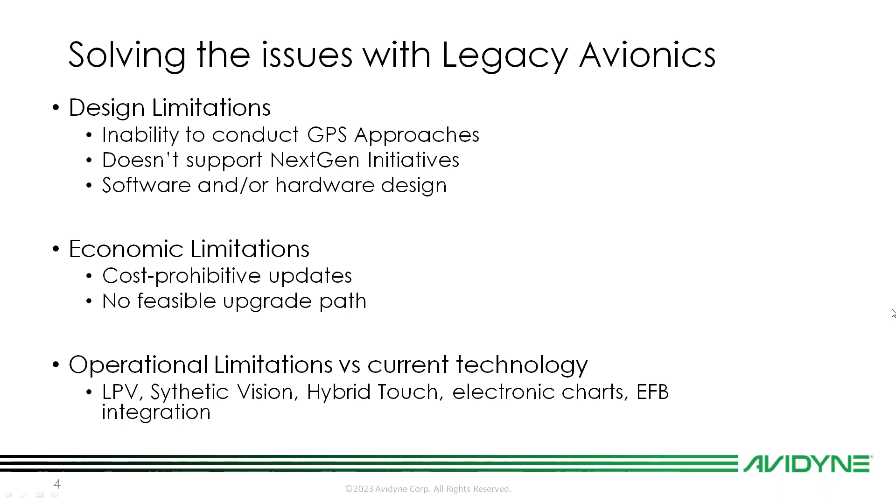Awesome, Bill. Appreciate it. Thank you very much. So what are we talking about here?

Legacy aircraft and orphaned fleets have intrinsic value that can make them viable platforms in today's business class and cargo markets. The intrinsic values include long service lives, lower operating costs, hull values that make economic sense, but they all have the same Achilles heel: your avionics. So for this discussion, legacy aircraft are going to be aircraft that are still providing a very active role in accomplishing today's business, passenger travel, cargo transportation, but they're not a singular integrated avionics suite.

This term legacy aircraft can also be applied to aircraft considered orphan fleets, or aircraft that don't have a direct channel or support arm for upgrades, making them relevant today.

Just an idea of a couple of the aircraft that can benefit directly from Atlas include everything that you see here. Along with a number of other aircraft models not listed, these aircraft make up a really large portion of the operating fleets today, and every one of these can directly benefit from the cost-effective solutions offered by Avidyne. Bill, I'm going to hand this over to you.

Yeah, sure. One of the biggest points of contention here, to dovetail back from the last slide, has to do with cost prohibitive updates. All of these aircraft are influenced by that same issue, which is how do I get my avionics suite upgraded and not break the bank? That's important because there's a typical threshold somewhere around 20% of the hull value of an aircraft.

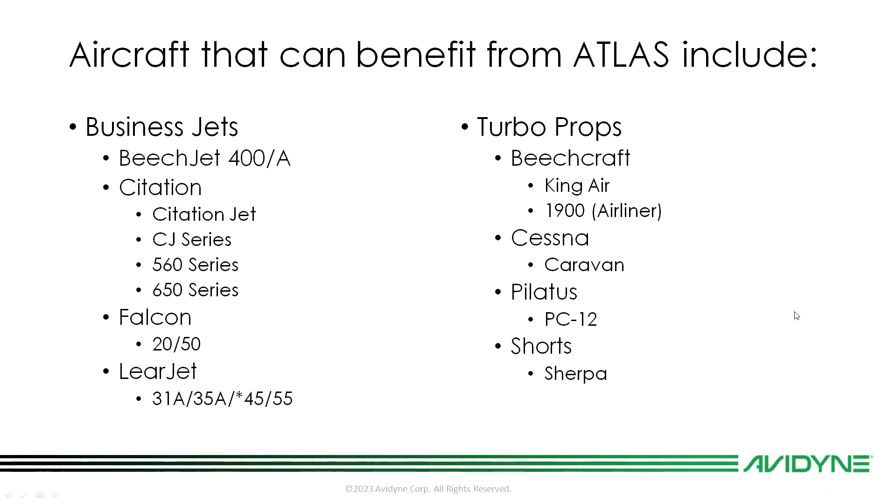I think the key point behind this is the 2 main bullet points: agnostic integration and cost-effective solutions. I think they kind of go hand in hand. Over the years, other OEMs have gone from 'we'll work in any flight deck and we are here for you' to, as popularity grew, 'we're now going to make this a more integral flight deck where you have to have our equipment only.' All the OEMs have kind of done it that way, through the progression of EFIS systems, whether it's Honeywell, Rockwell, even Garmin to a large extent.

But the issue ends up being what happens when you're X amount of years down the road and support on that equipment has dried up, and it's not only integral but has proprietary software in it. That means I don't have a path for doing an agnostic system upgrade - I can't just grab something off the shelf from the past several years and plug it into my deck, because I don't have the software to make those communicate. That's why these legacy flight decks are such a good value point for the Atlas systems - they're opened up to talk 429, some 232, some older legacy ARINC protocols, and we're able to really address those markets in a very concise way.

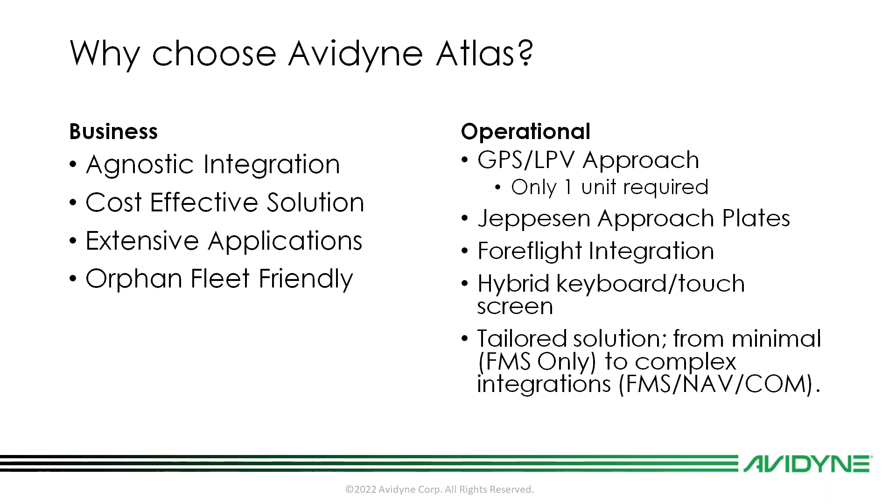Moving right along, we'll get into a little bit of an overview of what Atlas is, what it can do for you, and the technology that we bring in, and what we can provide these aircraft. So, what is Atlas?

It's a new multifunction SBAS FMS that sets a new standard for integration in turbine class navigation systems. Atlas provides full RNP and RNAV capability, including localizer performance with vertical LPV, lateral LNAV, VNAV, LNAV only, and approach procedures with vertical approach modes. We do that through our GLAS technology, our GPS legacy avionics support technology. We'll go into that in some future slides. What it can provide for you right now is full RNP, RNAV capability, LPV, LNAV, VNAV, LNAV only, APV modes.

We've got hybrid touch, which we come to find out the operators that need this solution absolutely love, the combination of touchscreen and knobs and buttons. It's really taken off in the Part 25 world, they're absolutely loving this. Moving maps with airspace, terrain, nav aids, airports overlay on your FMS.

Options for radar, video, TAWS-B. The option for an integrated VHF comm or VOR localizer glide slope radio if we want an integrated solution. Traffic display from TCAS, ADS-B. FOQA support is a major part of this too, we've got some great FOQA integrations that we can do with the Atlas. Jeppesen georeference approach plates and airport diagrams, and of course ForeFlight and other EFB integrations.

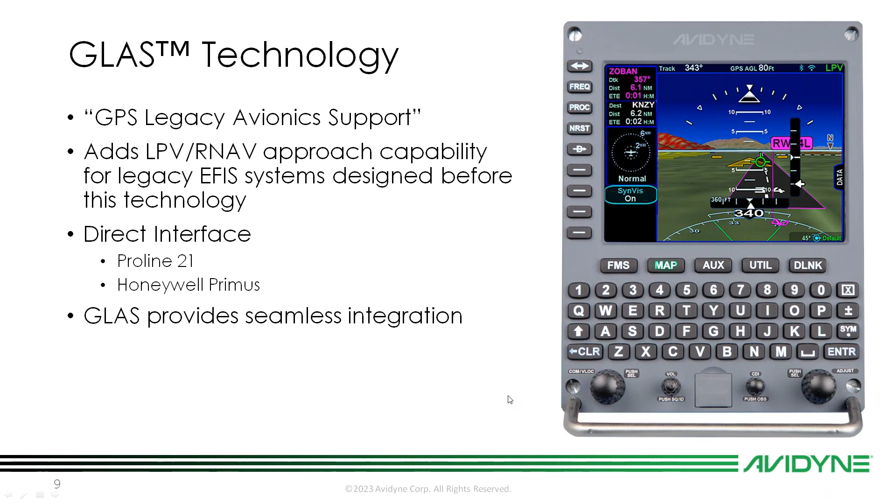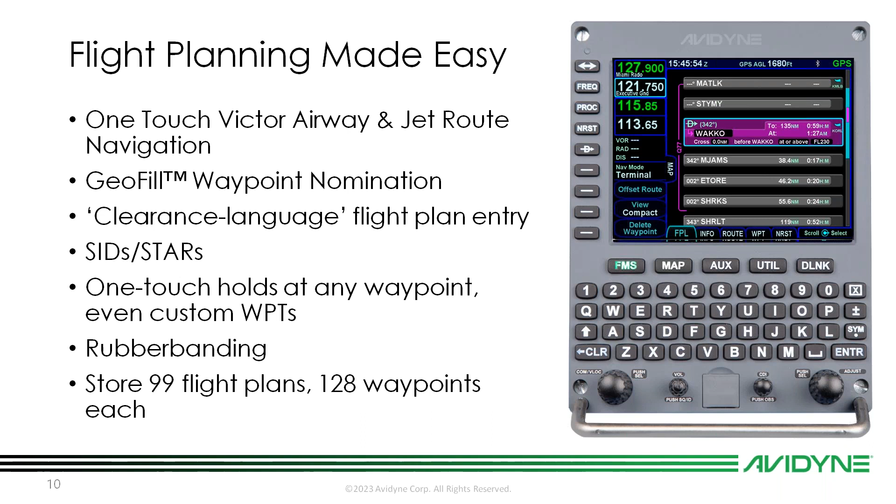Rubber band flight plan editing right here on the Atlas. We've got the ability in each Atlas FMS to store 99 flight plans with 128 different waypoints for each flight plan, and we can store those all in each Atlas. So with two Atlases, you've got double the amount of flight plans you can edit, in case you wanted to.

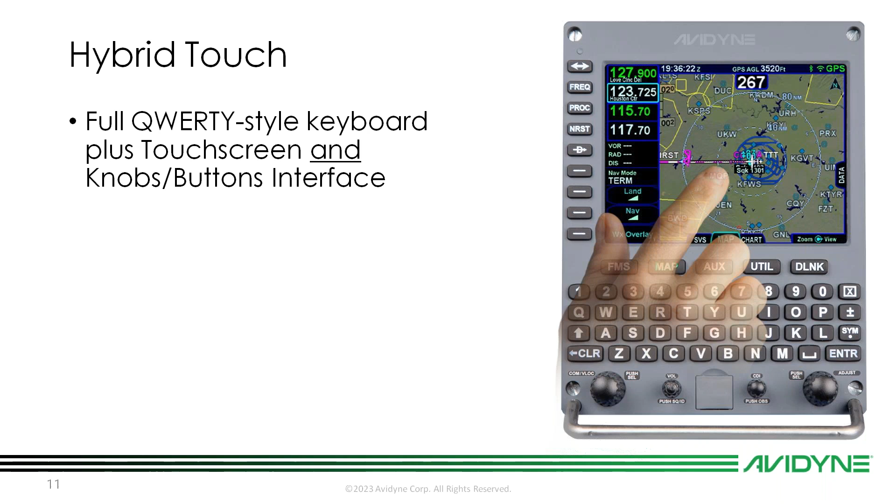So we talked about hybrid touch, right. With hybrid touch we have the ability for touch screen and knobs and buttons on the IFDs, very similar, just about anything you do on the touch screen you can do with knobs and buttons. With Atlas, we've taken that on-screen keyboard on the IFDs and brought that into a full QWERTY physical keyboard, plus the ability for touch screen and knobs and buttons, all on the Atlas units themselves.

We've got the moving map here, so the flight plan is displayed over that map. We can display that map in north up, heading up, track up, with simple one-touch orientation, we do that with the bottom right knob there. The terrain-based map, we have that ability to overlay that on the map too.

Customizable map overlays of off-route waypoints, nav aids, and special use airspaces, plus our customizable data blocks. Now we can see we've got the airspace on our map, terrain that we'll be able to show, airports and airport information right there on the map, and of course all of our nav aids. All of these are completely customizable. I can filter these out if I want to.

I can completely change how these show up with my map zoom, whether that be pinch zoom or turning zoom in and out with my knob. I can show all of these different things and filter them out in certain layers, so it's completely customizable there.

We've got the ability for optional radar and video inputs. This is one of the two different options. If you look on the left side, you'll see our radar overlay here. This is a dedicated radar page, but I can also show this on the map, so I can have a radar overlay on my map.

That supports the RDR 2000 series digital radar. It does have vertical profile support, and it can replace legacy indicators or act as a repeater display for existing radars. Another thing here is the video.

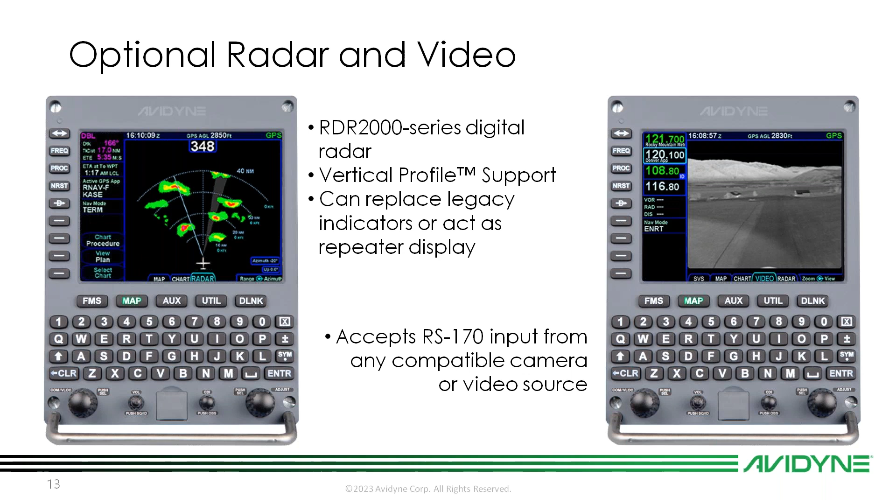So I can accept any RS-170 input from any compatible camera or video source. That is a hardware modification. We'll be able to display that on a dedicated video page on the Atlas. So if I have a camera in the front, the back, infrared, or thermal cameras, as long as I'm getting an RS-170 feed into the Atlas, I can show it on the video tab on my Atlas displays.

And of course, optional TAWS-B, we do have that as an option as well, in case we want integrated TAWS inside the boxes. I know a lot of you guys, and Bill, maybe you want to chime in on this, but most of these installations already have an external TAWS. We do want to let you know that we do have the ability to provide a TAWS unlock in the Atlas boxes themselves.

Bill: A lot of these aircraft are already incorporated with either a TAWS-B or even a TAWS-A solution. So I kind of see this as more for the older fleets, the ones who have been using a very minimal TAWS, maybe a 560 or KGP 560, something like that. But if you're looking at the Mark 5, Mark 7, Mark 22, depending on your platform, this would not be a replacement for that, but it's a very good option for if you're looking for TAWS-B. If you're not interested in the TAWS-B option, you can disable the alert systems and just use the map scenes, the synthetic vision screens for situational awareness.

Yeah, so it's really good for people to know that if you don't have that solution, we can provide it.

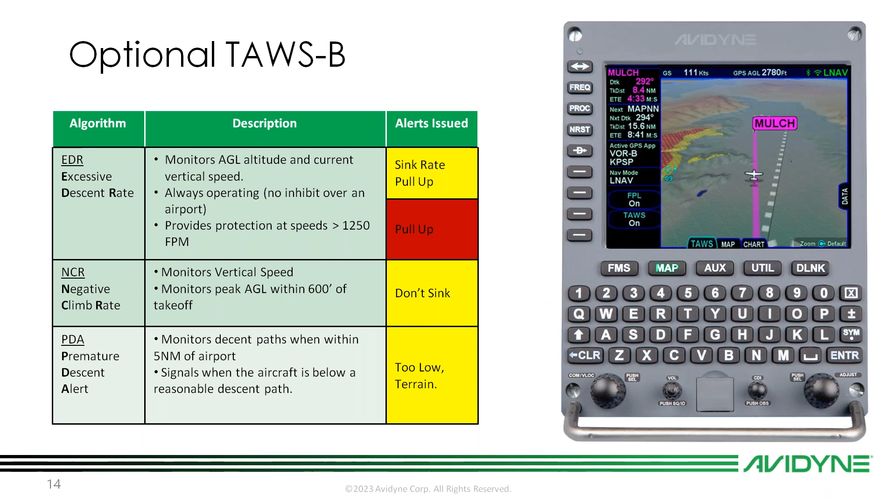All right, so we did mention an optional VHF Navcom. Atlas does have the ability to provide an optional integrated VHF communication and nav radio in the same box. VHF COM capability provides a powerful 16-watt transceiver with frequency nomination and station identification. It also includes the ability to monitor the standby channel at the same time as the active channel.

Bill, is there anything else you want to add here for the optional VHF Navcom on Atlas?

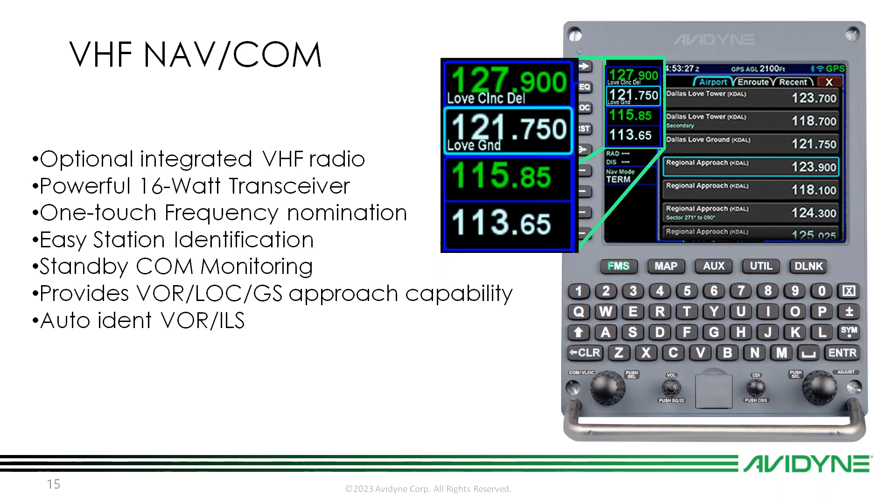The only thing I really think needs to be added is this just goes to show the ability for us to tailor the solution to the aircraft. If it's an FMS you need and the existing radio stack doesn't need to be replaced, we can march on with that. But if there's power in the pack, we can get rid of an awful lot of remote boxes, and everything's incorporated into our radio stack—it works well, it's a seamless operation.

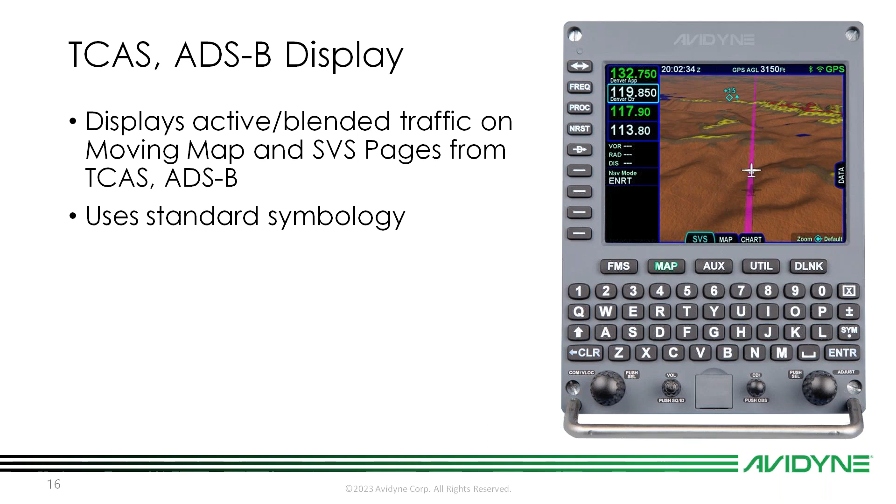TCAS and ADS-B display, we can show that on the SVS or TAWS page, as well as the bird's eye map page overlay. That'll display active and blended traffic on a moving map and SVS pages from TCAS and ADS-B, using standard symbology. If TCAS can't be blended with TIS-B traffic, Atlas uses TCAS and FIS-B weather displays also.

Bill, is there anything you want to add for FIS-B weather? No, FIS-B weather, we're in good shape with that right now.

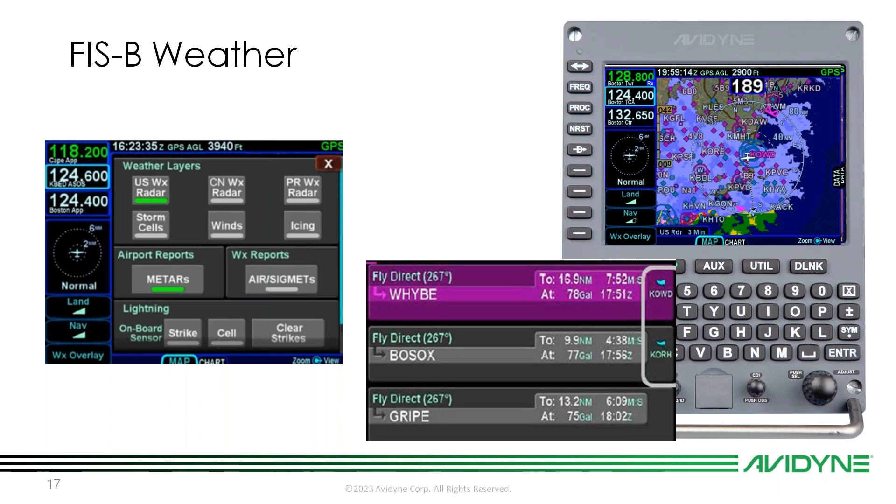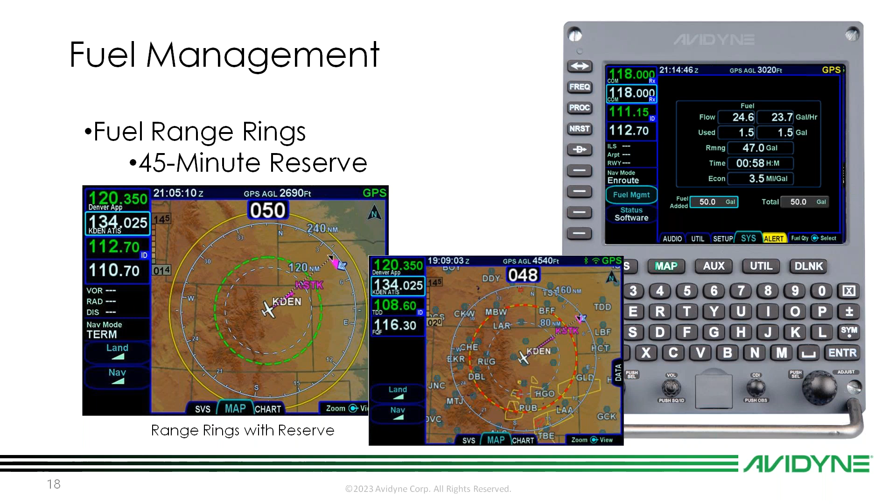Okay, great. So fuel management, that's another big thing. We have the ability to bring in and display fuel totalizer information, but we've also got fuel range rings. That'll show a 45-minute reserve - that's your green ring. And then once we get below our 45-minute reserve, those rings become hatched yellow and red. So we can see that on the Atlas.

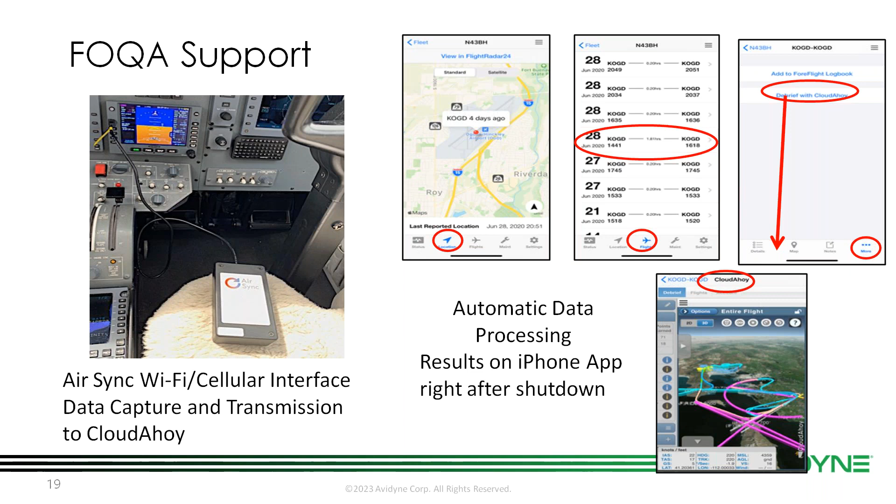Another great thing is FOQA support - we mentioned this a little bit earlier. FOQA, of course, stands for Flight Operations Quality Assurance. With a device like the AirSync, we can feed all the information we need for our FOQA programs for our operators to be debriefed with something like CloudAhoy, bringing that information right into that app. So really tight integration with that - really awesome technology, which supports all of our operators and our fleet's FOQA programs.

Bill, is there anything you want to add on FOQA? No, that's okay. You did a good job of that.

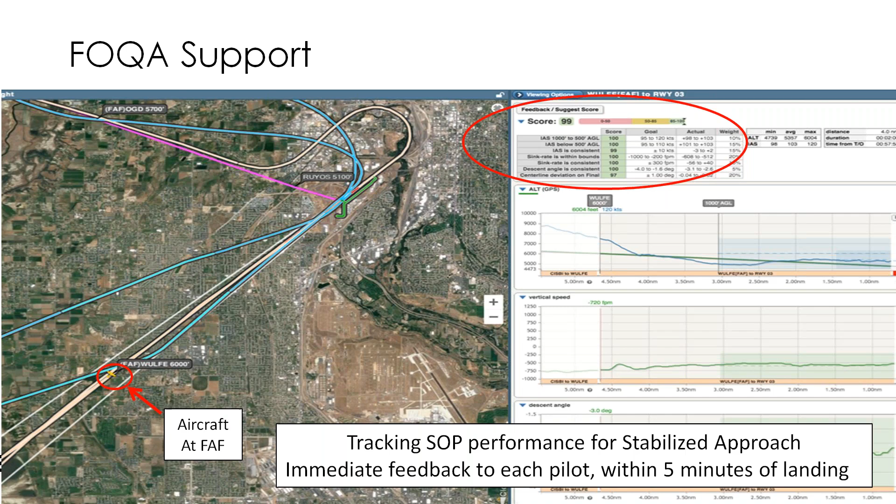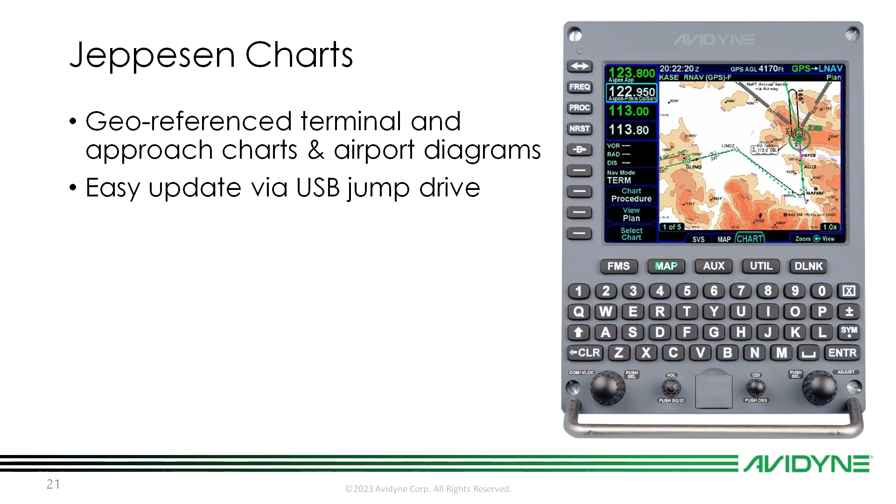Okay, so moving on, Jeppesen charts. We've got georeferenced terminal and approach charts and airport diagrams that we can display. We have the ability for some wireless integration - Wi-Fi on our iPad with IFD 100 and other EFBs. But you can easily update your Jeppesen charts via a USB port. Nothing proprietary about our data uploads and downloads - it's done via a simple USB stick, right on the bottom center of the Atlas bezel. Any USB formatted to FAT32 will work, preferably under 32 gigs, and we'll be able to upload those charts on the chart cycle schedule.

We talk about ForeFlight integration and some other third-party EFBs we can do that with as well. The Atlas, as well as the IFDs and even Helios, all come with built-in Wi-Fi, making for easy flight plan transfer with some of your favorite EFBs. ForeFlight being the biggest one, but we integrate with other third-party EFBs too. We make our software development kit available to those developers for integration. So you've got your ForeFlight there - we use that all the time. Maybe your Part 135 outfit uses that a lot, they've got an EFB they like to use, usually ForeFlight, but we can certainly integrate with that.

So with that, let's get into some of the specifications. Bill, this is really your slide here, bud. If you want to go into some of the specifics, especially about the certification stuff - I know we're going to talk about the specifics on the installs a bit later - just a brief rundown of what Atlas is about, what it looks like, and what it's designed to do.

So the Atlas is designed to be a replacement for a legacy FMS CDU. We have an awful lot that went into this. One of the ideas behind the architecture was to be able to replace a dzus-mounted LRU with our box, and our box works well in this scenario, because we can either do a side-by-side with a dual Atlas system, or an Atlas to an IFD system, in which case everything is synchronized, so all the information is passed back and forth very seamlessly.

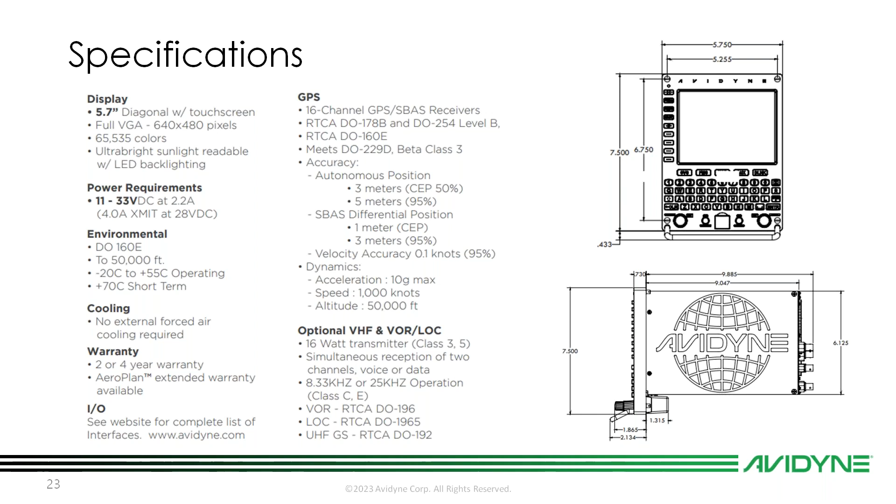Awesome, Bill. Yeah, thanks. So now we're going to get into installation considerations, right? So a really, really cool thing about what we can do with this.

So of course, with the Atlas, it does require a TSO C190 WAAS antenna, and that unlocks all classes of GPS operation. For single pilot IFR, of course, you need GPS approach annunciators on the pilot side only. Now, of course, for dual pilot operations, then you need to put annunciators on both sides.

Now, because we only need one GPS, and Bill backed me up on this, we can tailor a solution, an installation solution for our single pilot IFR operators. We're only needing to add one set of annunciators on the pilot side. But for dual pilot operations, of course, we can certainly do that on the co-pilot side as well.

And that's all true. One of the most significant points of that is that we can't guesswork our way through what your operational requirements are as the owner operator of these aircraft. It might be that single pilot operations is all you need, and even if it's a dual pilot certified aircraft, we're not going to put systems in on both sides.

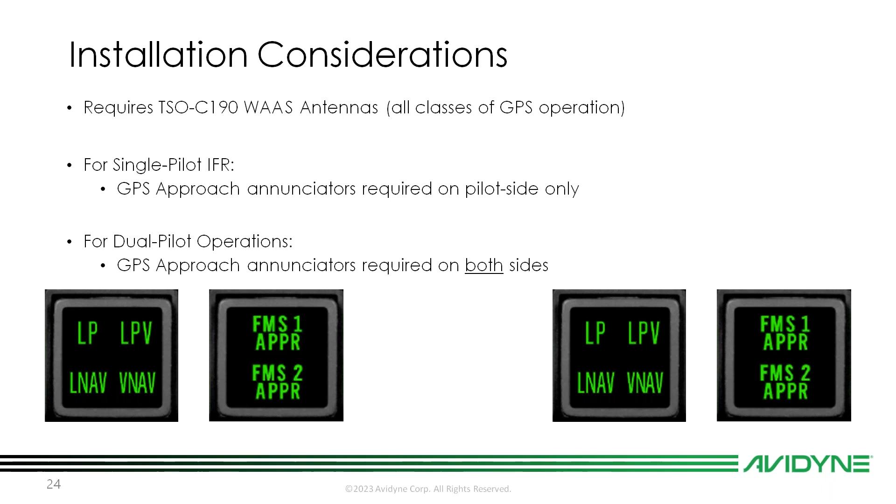But if you have a single pilot operated or certified aircraft, but your 135 operation, whatever it is, your flight environment requires you to have dual pilots, we'll set this thing up so that it's available on both sides of the cockpit, so either side can fly fully capable.

Thanks, Bill. Let's talk about redundancy. So other systems and older systems required 2 FMSs for GPS approaches, or a single FMS with an LPV monitor. By removing those 2 FMSs and putting in dual Atlas, because Atlas is certified TSO C146D for Gamma 3 operations, and because only one Atlas is required for GPS approach, by removing those 2 older FMSs and putting in Atlas, you instantly introduce true redundancy with a dual Atlas installation.

Is there anything else you wanted to add to this, Bill? I guess the best way to describe what we're talking about here is, it's pretty self-explanatory, but I've seen it in operational work where it wasn't understood until a failure happened. You're flying along with a dual UNS, and based on system limitations in their design, they require both of them to work. So if one of those goes down, you are no longer legal to fly an LPV approach or a GPS approach, in case it happens to be an LP or whatever.

So our box, the Atlas system, doesn't have that limitation. One box is completely certified to do all of that, and two of those give you the full redundancy that Mike just talked about. All right, let's get to the fun stuff, Bill.

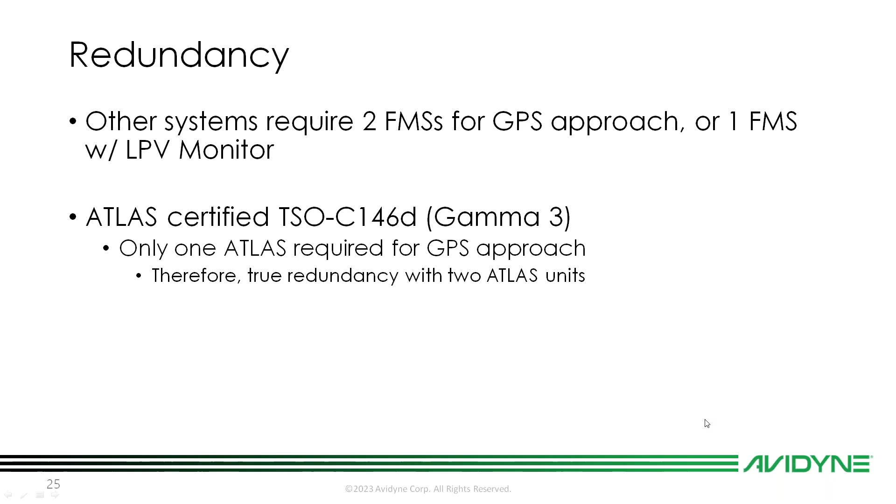Let's take a look at some installation photos. So here's a Lear 55 with an existing EFIS 85L.

And let's go to the, yeah, sorry, go ahead, Bill. No, this was actually a very interesting one, because there were some installation and design challenges that had to be met. But the interesting part about this one is that the operator called us today, absolutely loves what we've done with it, has asked us for more upgrades, and he's buying another jet that he wants to do the same installation on.

And this is a cross-continental operator. He's actually established in the UK and travels to the US often. Sounds like that upgrade made perfect sense to him.

Let's see what that looks like on a block diagram. Bill, this is kind of one of the more complicated installations, or what that would look like. And the reason why we put that up here is to show you what one of the more complicated ones would look like. In a lot of cases, it's not this convoluted. But anything you want to talk about specifically on this one?

Yeah, this one was a little bit of a unique scenario because the EFIS 85L does analog digital, and its primary interface for this is an ARINC 561 — I think it's a 571, I think is what it is — interface, and that had some unique challenges that actually required us to use the KA90 converter versus anybody else's converter.

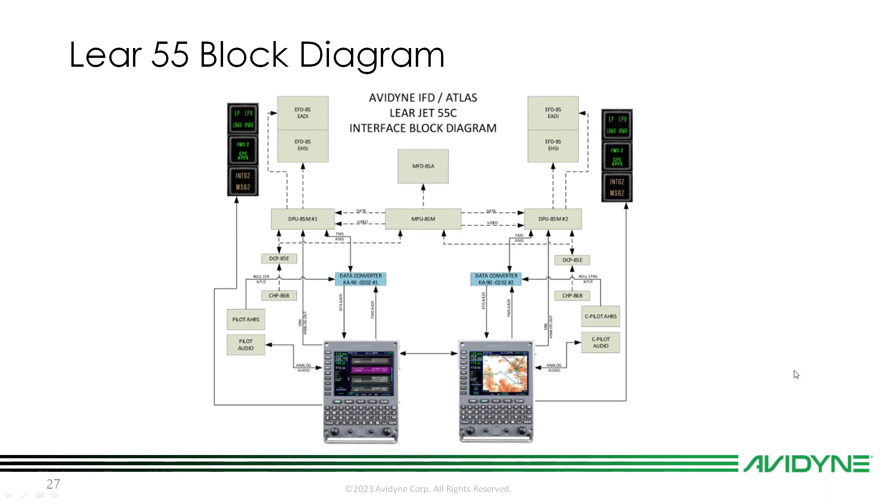This next one's a Citation 7 with a dual app. Lost you there, Mike. Hey, and we're back. So here's a Citation 7 with a dual Atlas and an SPZ-8000 system.

Bill, I don't know if you got any specifics on this particular installation, or if you want to touch on that before I move on to the Embraer? The interesting thing about these owners is it's not a large fleet of aircraft, but the owners love these airplanes, so they're well maintained. They're still viable planes today, but in this case, this one had GNS XLSs in it, and there was no path to get them into today's LPV world. So the Atlases gave them that opportunity, and as you can see, it's a good fit in that cockpit. I think it looks great.

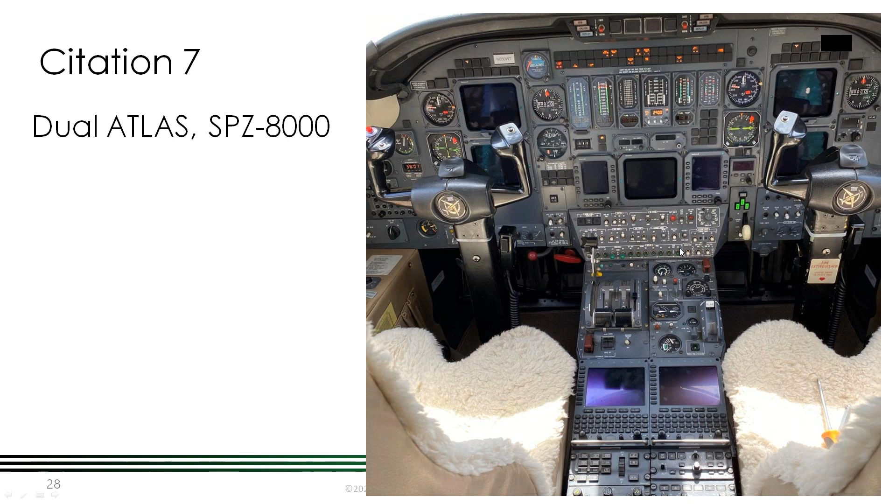Let's check this. Let's look. The Embraer 145 - single Atlas with a Honeywell Primus system.

So this one's cool because this is a test bed program right now, using an additional data converter for us to make this deck work. This is actually opening up the Primus 1000 decks to us, and this was our second test of the day. We did one on a Lear 45, and then the owner of the Lear said, 'Hey, while you're over there, would you mind taking a look at our Embraer 145 and see if there's anything you could do with that?' That evening, we actually had the system plugged in with needles displayed, and we're well on our way to making that our next cert deal.

Pretty exciting stuff, Bill. All right, let's move on to certifications.

All right, so we've got STC approvals for Part 23 and Part 25. There they are there, and of course DER 8110-3 approval for electrical engineering and AFMS. Bill, if you want to touch on this before we move on to the Q&A portion.

Yeah, sure. So the big part about this is that we do have aircraft quite proliferated on the Part 23 STC. The Part 25 is actually very limited to the Citation 560 models, which we're continuing to add on right now. But what we're doing in the meantime is working with a lot of DER approval data for electrical and system flight manual supplements. The reason for that is until we get to either critical mass in the amount of data we have, where we can turn it into STC information, or we have an actual STC project.

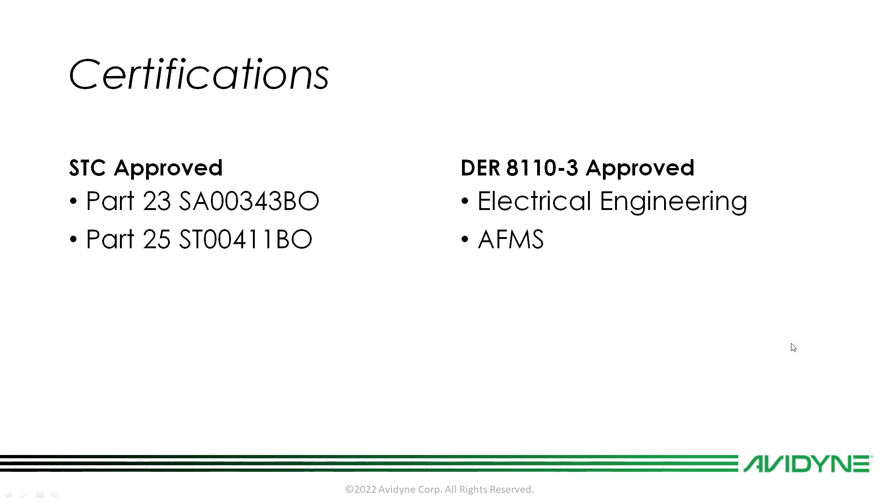That's right, that's right. We hit all those important parts that our customers absolutely need to have met - minimal downtime, reasonable cost, maintaining their profitability, maximizing their profitability, and a viable solution for the future, especially for the next gen program. So with that, I'll open it up for some questions.

Will Reichert has been fielding our questions in the chat. What do you got for us, Will? We got any unanswered questions so far? Sorry about that, was trying to find the mute button. We do not have any questions.